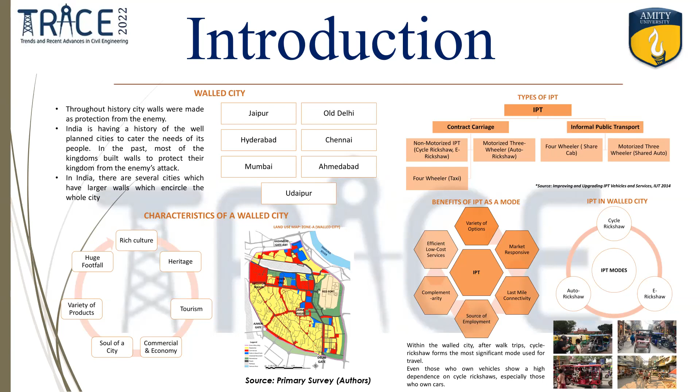The aim of my research was to analyze the impact and vitality of IPT in Walled City, Delhi, and provide suggestive measures to improve the IPT system and introduce an intelligent transport system in the study area, so as to improve the overall management and efficiency of this particular mode in the study area.

Three basic objectives were framed. The first was to analyze the existing IPT system, then to identify the issues and shortcomings of infrastructure and management in the existing IPT, and to deliver planning interventions for improving the existing situation of the IPT system in the study area.

For the literature review, a few papers and reports were referred to. The major findings helped me understand the role and impact of IPT in bridging the gap between public transport and other modes, especially the types of IPT and their roles, along with the character of the walled city and the specific role of IPT there, which I understood after studying the case studies of walled city Jaipur and walled city Udaipur, discussed further in the paper.

I also studied the role of cycle rickshaw in the walled city, including average trip length, fare, and preference of cycle rickshaw within the study area, the walled city of Delhi. This was from the paper submitted by Rajat Bose and PK Sarkar.

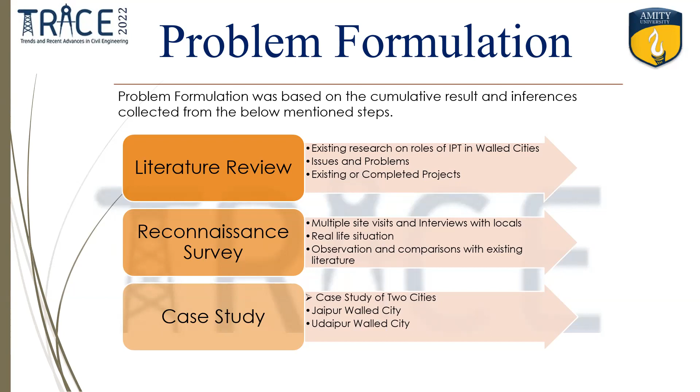So there were two case studies, Jaipur Walled City and Udaipur Walled City. Then the methodology: initially, the first task was identification of the problem, for which I had to finalize a study area. After finalizing the study area, literature review and case studies were done on the basis of the study area, and then the objectives and aim were formulated.

The next step after finalization of the aim and objectives was data collection. For data collection, both primary and secondary data were collected. For primary data collection, surveys like OD survey, recce survey, TVC survey, interviews, travel speed survey, and speed delay survey were done. For secondary data, maps, reports, and documents from RTO, development authorities, and municipalities were collected.

The next step in the methodology was data analysis and inferences. Then a SWOC was prepared, and after that proposals and planning interventions were provided. For data analysis, five parameters were taken out from the inferences of the case studies: road network characteristics, travel characteristics, traffic characteristics, IPT infrastructure, and traffic management.

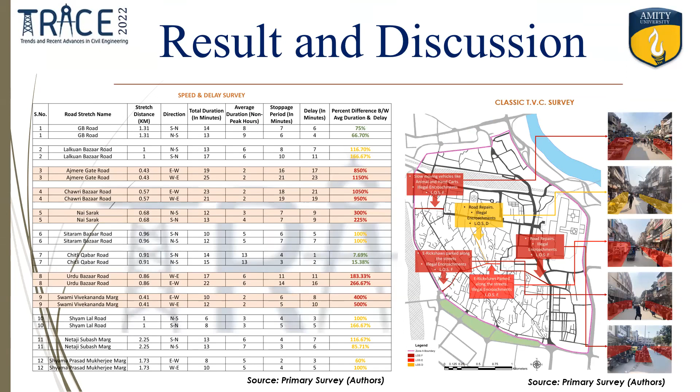To understand the socioeconomic profile of operators and information regarding IPT users, two surveys were conducted: IPT operator survey and IPT user survey. From this it was observed that the major issues were that it was an unorganized mode, there was lack of infrastructure provision by authorities, heavy competition due to large fleet size, price controlled by contractors, no provision of stands, undefined routes and fares, and a lack of economic stability for drivers.

After doing the complete analysis, multiple issues were identified, and for solving these issues proposals were provided: route management, new IPT policies and framework, enhanced usage of ITS and IPT management, provision of IPT infrastructure, financing of IPTs, fare fixation, and junction redesign.

In the end, I would like to conclude that IPT, even though it isn't formalized, serves a huge population in India, and it can be the key link for a successful public transportation system in India. Through this research, what was aimed was to establish the role of IPT as a key link between MRTS and people, so it can bridge the gap currently present in the existing system.

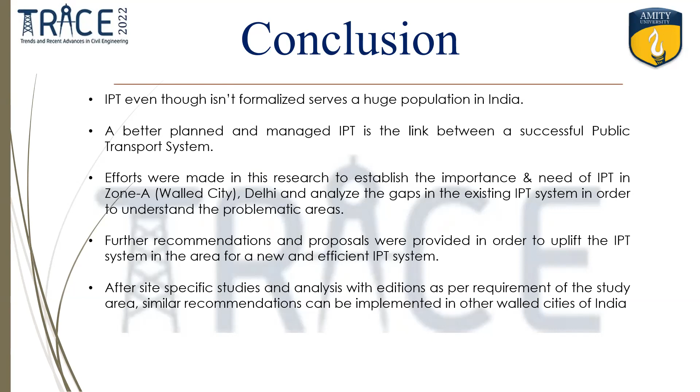Recommendations and proposals were provided in order to uplift the IPT system in that particular area for a new and efficient IPT system. After site-specific studies and analysis, with additions as per the requirement of the study area, similar recommendations can be implemented in other walled cities of India as well. So, sir, with this, I conclude my presentation.

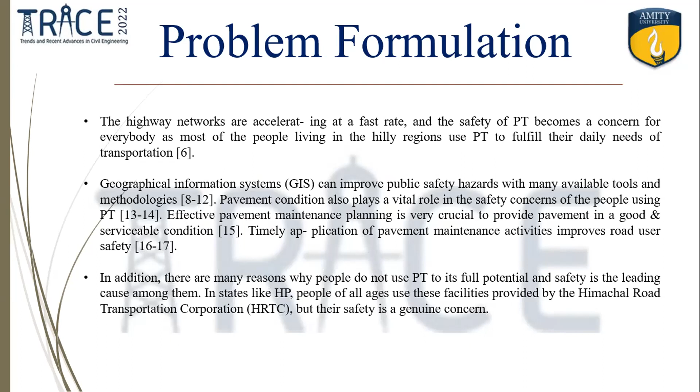In Himachal Pradesh, the main public transportation facility is given by Himachal Road Transportation Corporation, where public and private buses are used. The accident pattern was analyzed, with data collected mostly from police stations and previous literature. The data were collected and a questionnaire was formulated, with the help of which people were surveyed.

A one-to-one survey was conducted, as we, the research scholars, went to people in Himachal Pradesh where they could be asked various questions. The data was then collected, and a qualitative and quantitative analysis was performed.

The questions included: how old are you and the other members of your household? Are you a caregiver for a person over age 60 or with a disability while traveling? What are the advantages provided to disabled people?

Other questions asked whether they would prefer an MRTS if constructed in Himachal Pradesh in future, what type of buses they prefer—private or public, old or new, or AC Volvo buses that ply on various routes and origin-destinations—and if they do not use the bus, why not.

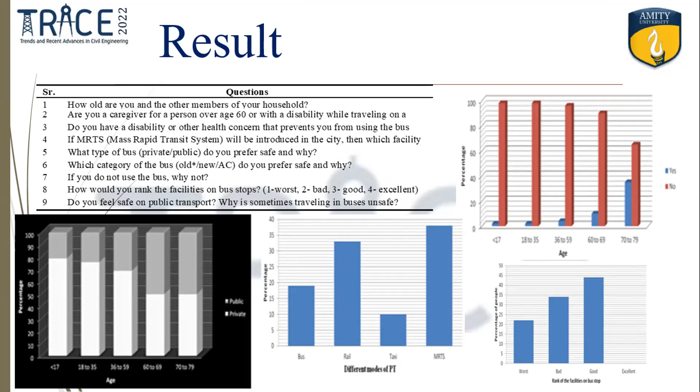Based on that, various results emerged regarding reasons for unsafe travel, such as rash driving and night driving, where drivers drink and then drive, causing various accidents.

However, the massive challenge in Himachal Pradesh is to fulfill the needs of all groups of people. Security is essential for everyone, providing safe and low-cost public transportation. So people prefer public transportation, but safety is always neglected because there are various old buses plying on these hilly routes.

If the old buses are replaced by new ones, the facilities can be improved and people will have better service, and based on that, the safety of the people will also not be compromised.

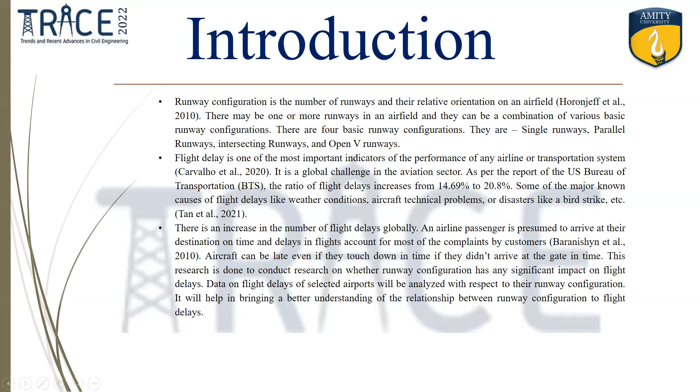So for flight delays, we have runway configuration. We have four types of runway configuration. The first is single runway configuration, where we have only one runway. This is ideal for small airports and similar cases.

And second, we have parallel runway configuration. This is mainly used for large airports.

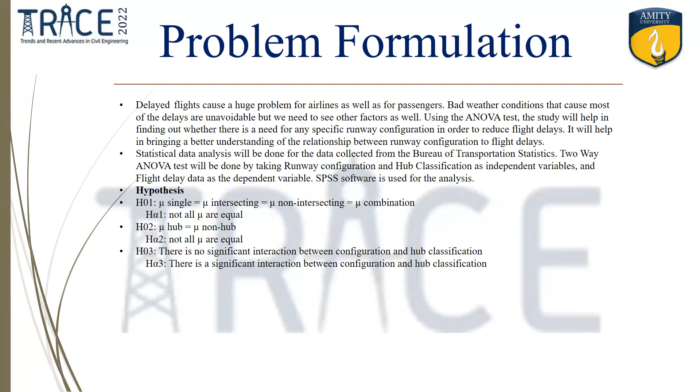In methodology, I have collected data from various airports in the USA. 40 airports were selected with different runway configurations. I have classified the runways into single, intersecting, non-intersecting, and combination, because in actual airports we don't only have open V or parallel runway configurations.

So we have to configure it this way: if there is only one runway, we set it as single. If they are intersecting, we set them as intersecting. If they are non-intersecting, we set them as non-intersecting. And for combination, if there is a combination of intersecting and non-intersecting runway configurations at an airport, we classify it as combination runway.

And for hub classification, according to FAA, airports are classified as hub or non-hub. So these are the data I have collected for the 40 airports.

Delay data of 2021 in percentage. For data analysis, I have done two-way ANOVA in the SPSS software, done at the 0.05 alpha level. This is the descriptive statistics for the delay data, showing the mean and standard deviation and the number for hub type, non-hub type, and all this.

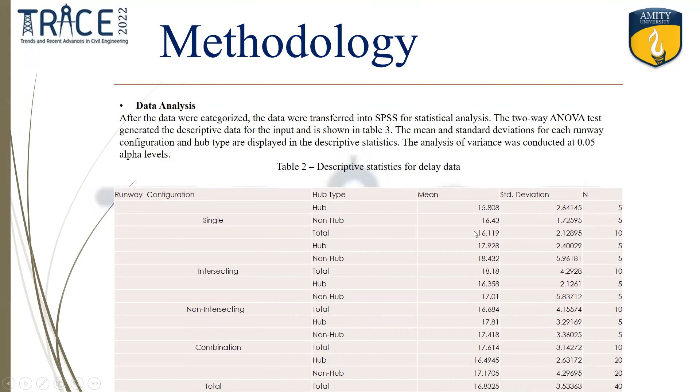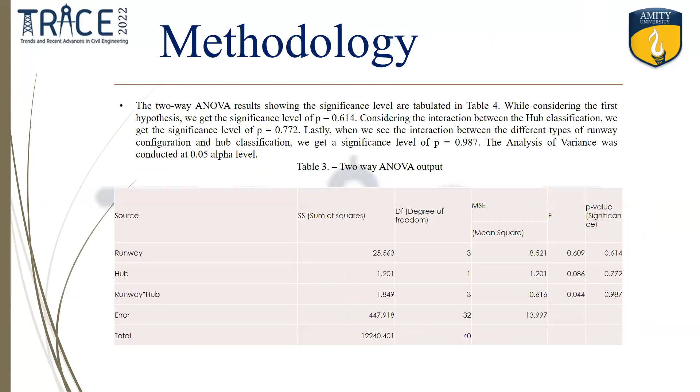Please try to wrap it up in the next 1 minute, sir. Please try to wrap the presentation in the next 1 minute. So representation - yes. This one, no? I'm saying we have limited time. Please try to wrap the presentation in the next 1 minute. Okay.

So we have failed to reject all three null hypotheses. There is no post hoc test required because all three null hypotheses failed to be rejected.

In conclusion, the study concluded that I selected data for airports with more than 10,000 passengers annually. For that, no specific runway configuration plays a significant role in flight delays. So for reducing flight delay, no further studies among the 4 types of runway configuration in the USA are required, but this will be helpful if we consider airports from other parts of the world as well.

Lastly, the concept of circular runway configuration may be adopted on a trial basis. Since the 4 basic runway configurations did not play a significant role in flight delay, we can try the new type of runway configuration - the circular or endless runway configuration. Though it is still an idea, we can try it on a trial basis. Thank you, sir.

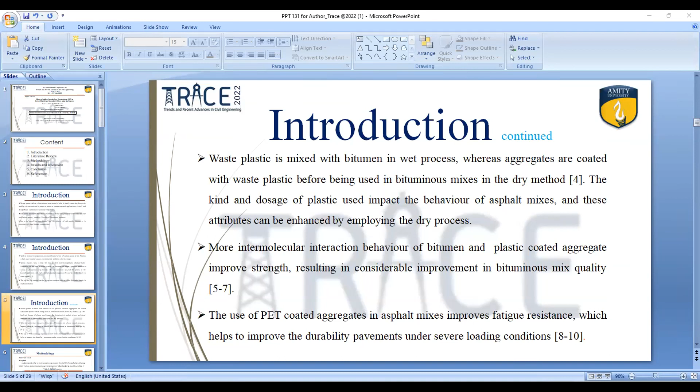Yes sir. The proportioning of material affects the mechanical and volumetric properties of bituminous mixtures. As demonstrated in the previous table, the material proportioning for dense bituminous macadam was carried out. 1200 grams of material was used to create the Marshall specimen.

Bitumen concentration varied between 4.1 and 4.9 with 0.2% increments. Separately, the bitumen and aggregate were heated to 150 degrees Celsius and 170 degrees Celsius. Once the bitumen was suitably coated over the aggregate, filler material was added after the materials had been well mixed to create a homogeneous mixture.

Then hydrated lime filler was added at the end of mixing to control the voids in the mixture. When the mixture was uniform and ready to be put into the Marshall mold, mixing continued at 160 degrees centigrade, then 75 hammer blows were used.

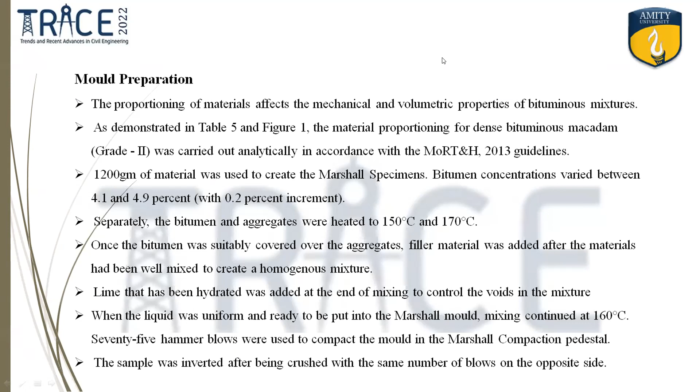So these are the samples. Then the Marshall stability test, then another test is retained stability, which is the ratio of Marshall stability of conditioned sample to the Marshall stability of unconditioned sample. Then the indirect tensile strength test, then the wheel tracking test.

Now these are the results. Marshall stability value of modified mixtures increases up to 10% PET concentration, and thereafter it drops the stability value. These are basically the various bitumen contents: first one is 4.1, then 4.3, then 4.5.

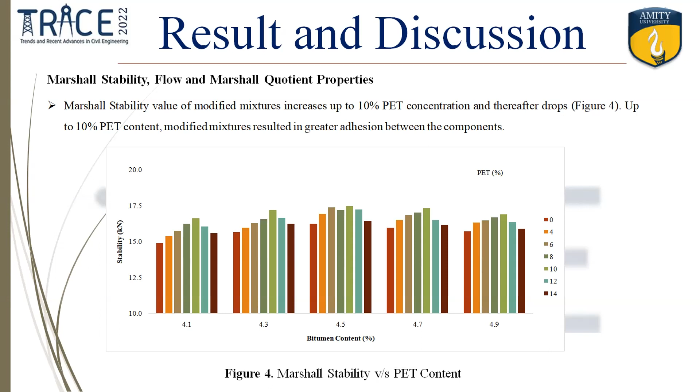Now come to the flow value. Modified mixes are attributed to fatigue cracking, going to increase stiffness up to 10%. Then come to the higher Marshall quotient, then the retained stability, which increases up to 12% PET content.

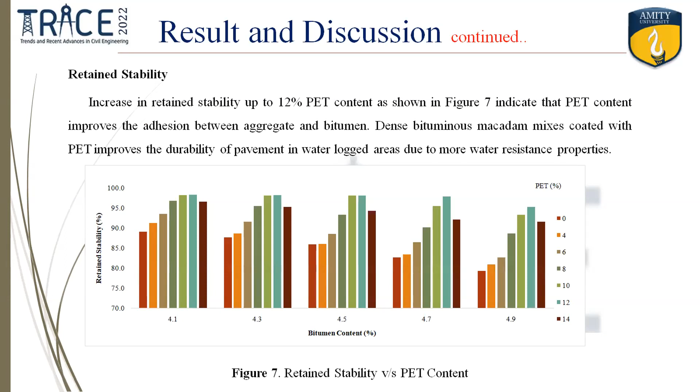As shown in figure 7, PET content improves the adhesion between aggregate and bitumen. After 12% it decreases. Then indirect tensile strength also improves up to 10% PET content, showing the results, after which it also decreases.

Optimum bitumen content comes out to 4.82%, whereas it is 4.50% at 10% PET. Rutting performance and behavior of conventional and modified mixes at optimum bitumen content is shown in figure, and these are the rutting results.

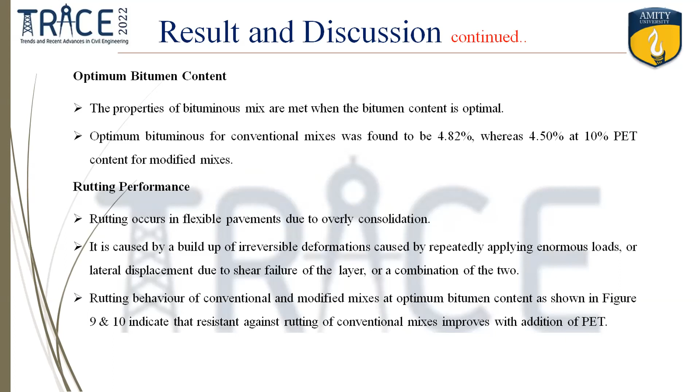Then come to the conclusion part. The goal of the study was to see how dense bituminous macadam grade 2 would react when polyethylene terephthalate was added using the dry process. The mechanical properties required for an ideal bituminous mix were assessed.

Marshall stability improved up to 10% PET concentration. The stability of modified mixtures demonstrates higher adherence. The flow value of modified mixes increases up to a dose of 10% PET and decreases thereafter. The Marshall quotient of modified mixture is higher, which fulfills the condition of stiff bituminous mixes. High retained stability of modified mixes increases the durability of flexible pavement.

With the addition of PET to DBM mixes, the optimum bitumen content was lowered to 4.50%. Compared to traditional mixes, the rutting performance is also superior. Hence, for safe disposal of non-biodegradable waste plastic, the present study is helpful for better durability of pavement along with environment-friendly solutions. Thank you. These are the references.

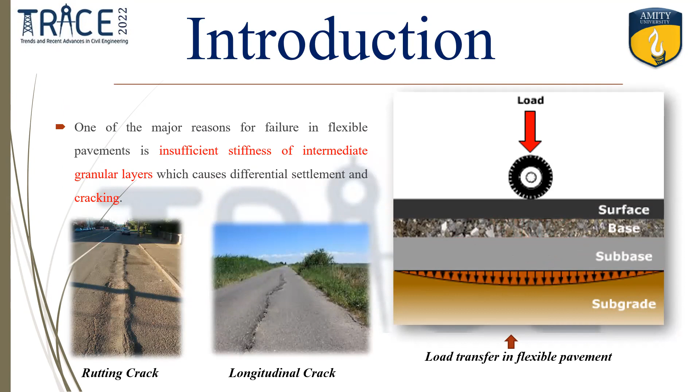As a little introduction, we all know the mechanism behind flexible pavement, the layered theory, which says that stress and deformation in one layer will get transferred to other layers as well. So if there is a weak layer anywhere in between, it will reflect as a crack on the surface. So it is essential to reinforce any weak layer if it is there in between.

Among the various techniques of improvement, geosynthetic reinforcement is a popular and most efficient technique. There are different types of geosynthetic reinforcement in planar and cellular forms. It has been used in other applications also, and in pavements too. Studies have proven that geocell, the cellular form, appears to be better than the planar form, the geogrid, due to the additional confinement effect offered by the geocell walls.

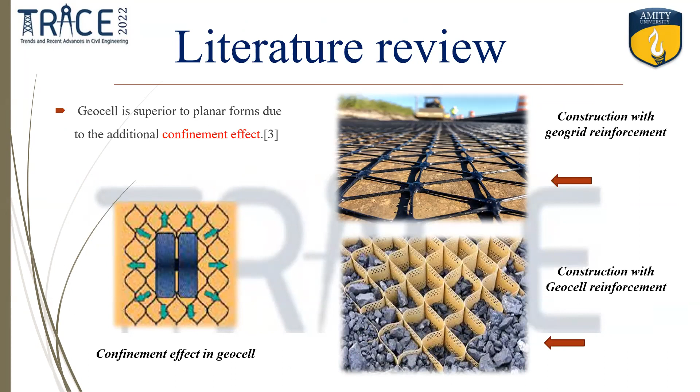The main mechanism behind geocell reinforced soil involves two mechanisms: wide slab mechanism and membrane action. The wide slab mechanism refers to the rigid slab-like action of the composite joint formed by the soil and geocell, which widens the load dispersion angle, so as a result the stresses on the lower layers get reduced. The membrane action refers to the tensile stress developed on the surface upon loading, which enables the membrane to take up a proportion of the imposed load.

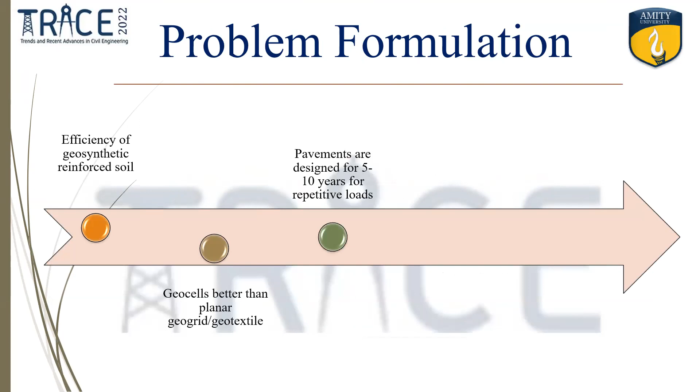So it is in this context we have formulated the problem, considering the proven role of geocells in improving pavement performance, we are assessing the time-dependent response through a study on various influential parameters. We are assessing the effect of various material characteristics of base material, properties of subgrade material, and of geosynthetic, as well as the effect of geocell geometry, that is aspect ratio. In both cases, we assess the effect in terms of wide slab mechanism and membrane action separately.

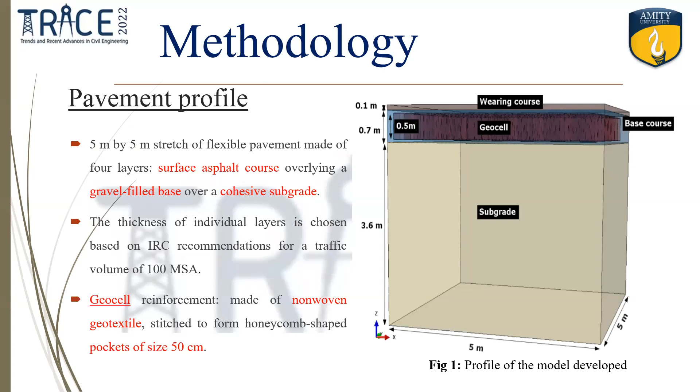This is the pavement profile we are assessing. It consists of a surface asphalt wearing course followed by a granular base in which we are embedding the geocell reinforcement, beneath which there is a subgrade. The geocell reinforcement is made of a non-woven geotextile.

We have a laboratory scale down specimen, using non-woven geotextile with stitched pockets. Using the scale down specimen, we are tracing out the coordinates to develop the numerical model as shown in the figure here.

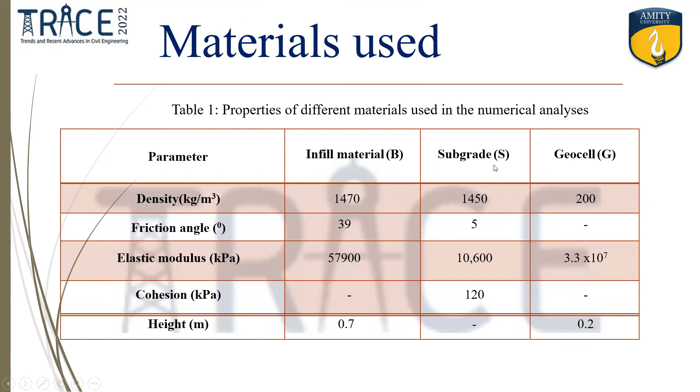These are the properties of materials used: the infill or base material B, subgrade S, and geocell G. These are the basic material properties, and with respect to this, we are varying the properties of base, subgrade, and geocell.

All soil layers are modeled using linear brick elements with reduced integration, that is regular stress elements, whereas the geocell or geosynthetic material is modeled using linear elastic behavior with membrane elements with reduced integration.

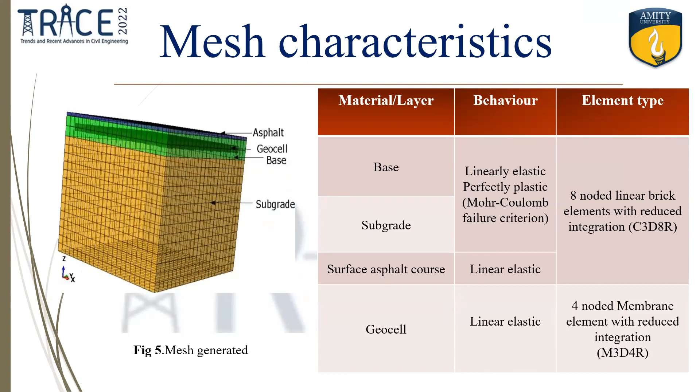Coming to the parametric study, we are assessing the effect of various material characteristics: the infill material is varied as B1, B2, B3, three different types of infill; then three different subgrade materials S1, S2, S3; and three different geocell materials. We are also assessing the effect of geocell wall height.

Three different heights of geocell are embedded in the granular layer of 0.7 meter thickness: 0.5 meter is the high geocell wall, 0.4 meter is medium height, and 0.2 meter is the low geocell wall.

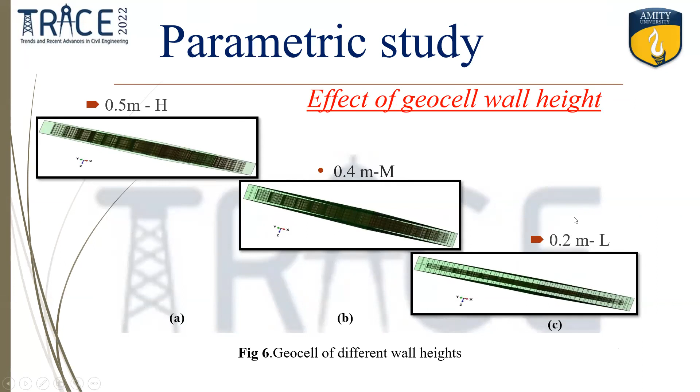Then we vary the subgrade characteristics, and the whole set of trials is repeated for the three heights: low, medium, and high geocell wall.

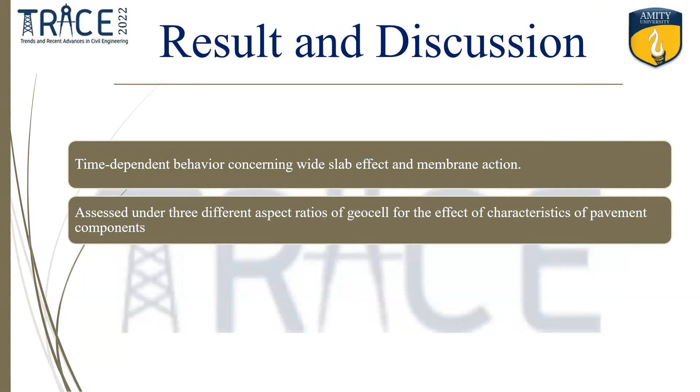Now coming to results and discussion, we are assessing the time-dependent behavior concerning the wide slab effect and membrane action under three different aspect ratios of geocell, for the effect of various pavement components. First, we assess the subgrade deformation with respect to time.

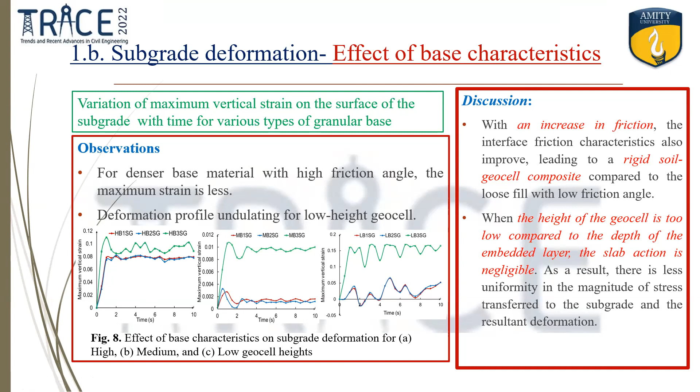Next is the subgrade deformation effect of base characteristics. This graph shows there is an effect from base characteristics: when using a denser base material with higher friction angle, the maximum strain is less. With increased friction, the interface friction characteristics also improve, so the soil-geocell composite becomes more rigid, and hence the maximum strain is less.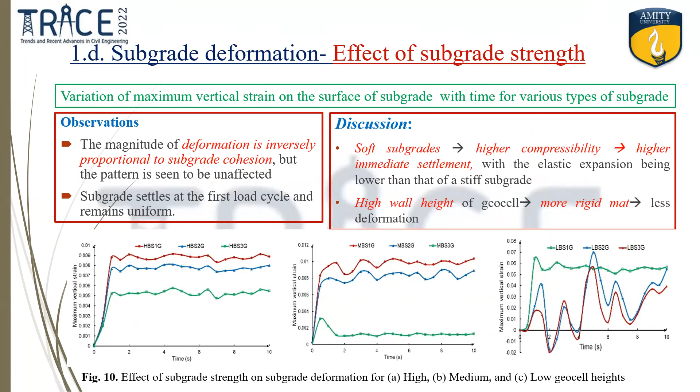And the fourth one is the effect of subgrade strength on subgrade deformation. The magnitude of deformation is inversely proportional to the subgrade cohesion. This is as expected, because soft subgrades mean higher compressibility, which indicates there will be a higher immediate settlement. So here also the fluctuations in case of low wall height are visible.

The second parameter compared is the surface deformation. The deformation is least for a high wall geocell and the most for a low wall geocell.

The third thing is the membrane action. So the first two compare the wide slab mechanism, and the third parameter assesses the membrane action of the reinforcement, that is the magnitude of shear stress mobilized on the geosynthetic reinforcement. It can be seen here that the membrane action is directly related to the geometry.

For high wall geocell, the shear stress developed is maximum. The pattern is almost the same for all three, but the magnitude of shear stress is directly related to the stiffness. This is expected because increase in wall height elevates the effective area of a geocell, so more tension is developed in the mat.

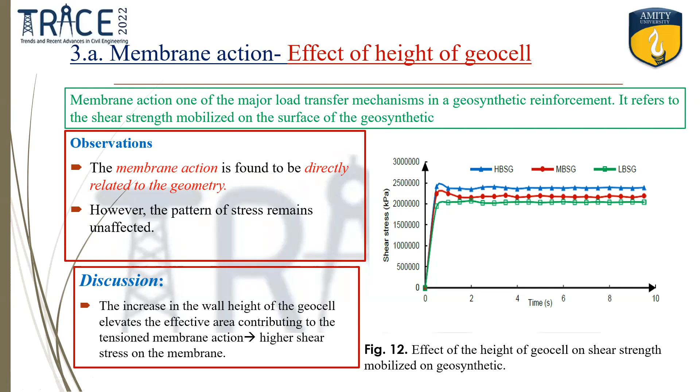Ma'am, last 2 minutes, please. Okay, trying to wrap it up soon.

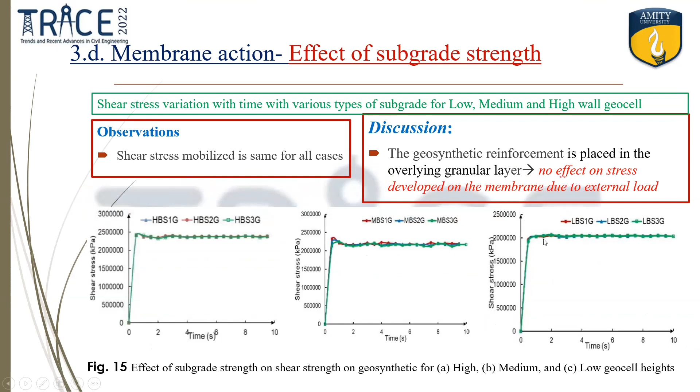So that's all. Now based on that, we have concluded this: the wide slab mechanism is negligible at a low aspect ratio of 0.4, and though it is affected by the characteristics of base material, subgrade characteristics, and stiffness of geosynthetic, the aspect ratio is very important. The membrane action is purely a function of stiffness and geometry of geocell.

That is, the characteristics of the geosynthetic is the only factor which affects the membrane action in a reinforcement. It is independent of the characteristics of pavement layers. And now, considering economy and efficiency, a minimum aspect ratio of 0.8 should be adopted.

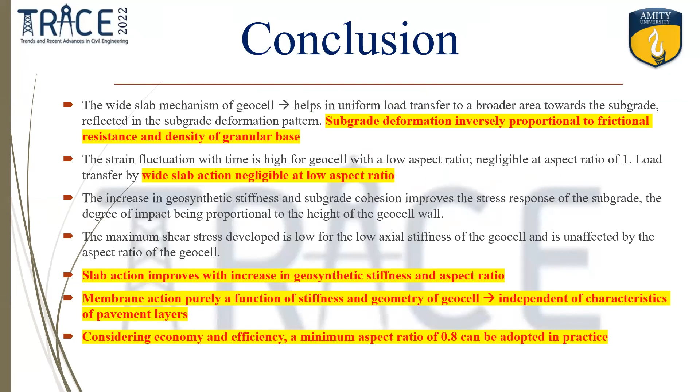And the scope for future studies: in this study, we are not including cost analysis, because a reduction in thickness cannot be incorporated into this, since we are considering a constant base granular layer thickness, as we have to embed the geocell of 0.5 meter. So cost analysis can be included based on the findings from the study.

And then the second thing is field studies, which can be incorporated for an overall assessment. That's all, these are the references. Thank you.

Thank you, ma'am. It was indeed a very good and informative presentation, quite an interesting topic as well. Thank you, sir. Abhishek sir? Yeah, thank you ma'am for the nice presentation.

Thank you sir, I'm just trying to understand, like you said, it is a time-dependent response of geocell. Yes sir. So when you're talking about time dependent, did you consider that over a period of time the material would also start degrading? Did you consider the decrease in strength of the material and pavement layers in your response? Because I did not see that it is time dependent, I need clarity from your side on this.

Yes sir, for this study we are not analyzing the variation in material characteristics with time, right? Yeah, obviously they'll also start deteriorating with time. For this study, however, the material characteristics are assumed to be constant. Okay, so but the stress developed on the membrane will be changing, and that reflects as the subgrade deformation and membrane deflection also. So in that sense, only the reflection of material characteristics will be done.

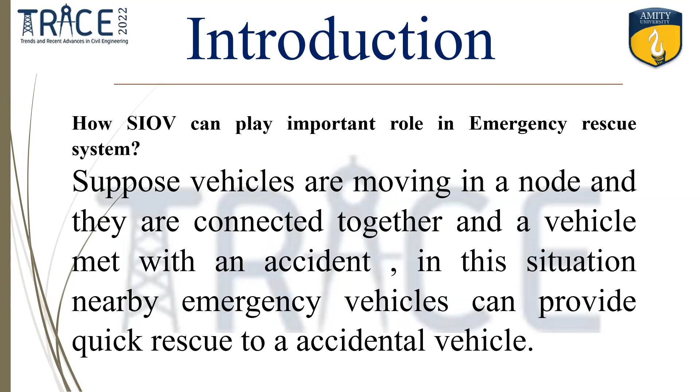I have referred to many papers, but due to time constraints in the PPT, I have only mentioned two authors about it.

Now the problem formulation. We have studied many review papers and found there is no such system available which can provide quick and effective rescue. So our basic idea is to develop a simulated environment to test such situations and build a system using SIOV, which can provide emergency support and be useful in many domains like defense, ambulance, and school buses.

For methodology, to develop an artificial environment we use SUMO and OMNeT++. We have also analyzed data collected from OMNeT++. A Python script was used to filter data, basically an ETL process has been done. So this is our project flow.

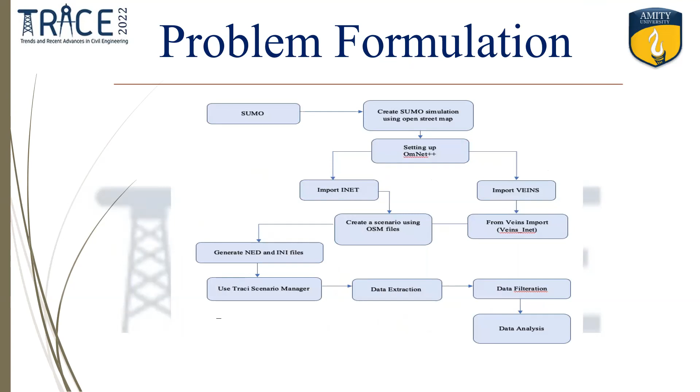Conclusion: in this study, when the first node — basically a car that meets with an accident — sends a packet, we named it 'accident first,' to the radio manager, it is then sent to nearby other nodes which are connected with each other. This shows communication between the vehicles.

This is very helpful, and if used in the real world it could solve many problems, like a school bus stuck somewhere, or it could be very helpful in emergency situations. We've seen many deaths from ambulances in India because of not reaching on time. With this system, vehicles could reach on time and lives can be saved.

And these are the references. Thank you, sir. If there are any suggestions from your side.

Thank you, Vishal. Quite a crisp presentation, I must say. Sorry? Dr. Abhishek, sir. Yeah.

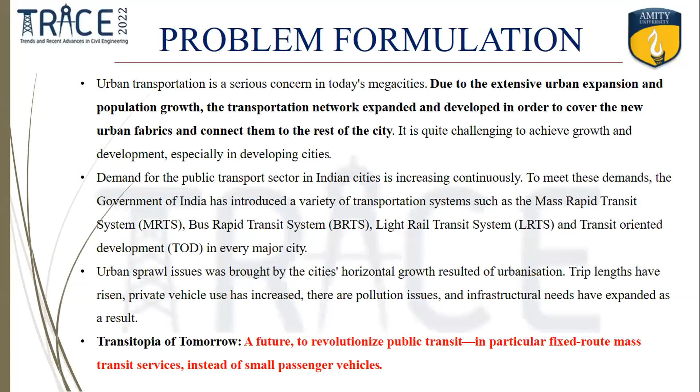So this paper's topic is on the Transitopia of tomorrow, meaning a future to revolutionize public transit, which is basically transit services for mass passengers.

The aim of this conference paper is to investigate the barriers and issues in urban mobility towards decongestion around the globe, to identify mode preferences and the behavior of passengers for travel preferences and first and last mile options, and to enhance public transportation and improve the physical environment in the TOD zone.

The objectives to achieve this aim are: first, to examine and expose various transportation related challenges around the globe and in India; second, to determine the issues and gaps in the current transit system; and third, to suggest viable solutions to the problems by investigating the current hurdles and issues.

Then the basic concept: what is TOD? TOD is transit-oriented development, which is basically focused around transit node facilities combined with complete ease to transit facilities, which includes preferences of people, like to walk, to communicate from one place to another.

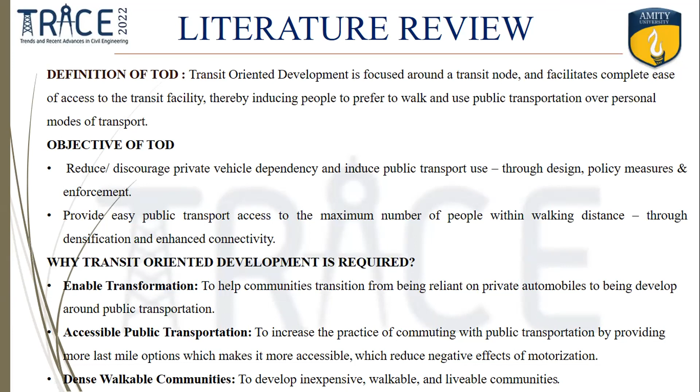Then the principles of TOD, like the policy given by NUTP, which is the National Urban Transport Policy - that TOD policy is defined with 12 measurable indicators, like multimodal integration, optimized densities, traffic calming, complete streets, mixed land use, managed parking, last mile connectivity, interconnected street network, inclusive habitat, and network, and street oriented building.

So on the basis of these indicators, there are 6 sub-attributes, like urban densities, land use diversities, walkable urban design. On the basis of these, there are a few case studies which I have selected for my research work.

These design techniques will finalize the demand estimations. First is reconnaissance survey, then secondary surveys, then a number of surveys like traffic TVC, traffic volume count, OD surveys, public transportation fare surveys, then willingness to shift and willingness to pay, basically whether people really want to choose public transportation or not.

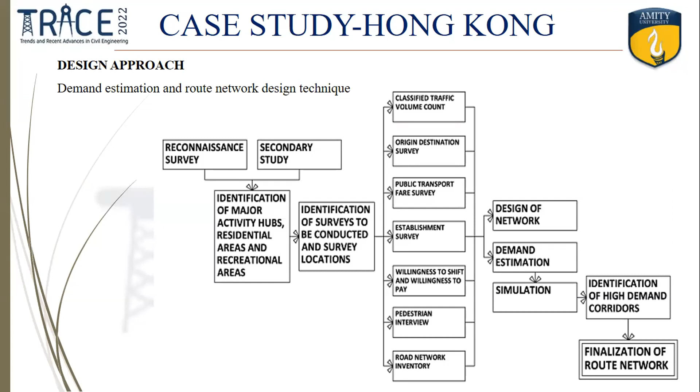Then pedestrian survey, pedestrian interviews, road network inventory. With the help of these surveys, we are able to identify the demand estimation, design of network, and the simulations of traffic flow. On these issues, we can identify the high demand corridors and finalize the route network of the particular TOD zones.

So there are a number of studies on the basis of best case practices where this case study will promote last mile connectivity, TOD development on different types of land uses, like in China, Singapore, Brazil. There are lots of countries where this type of public transportation has been initiated on a larger scale.

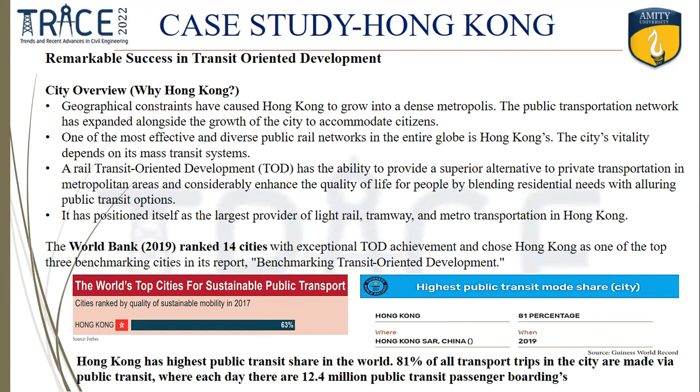Hong Kong is one of the world's top cities for sustainable public transportation, where the percentage of using public transportation is 81%. The model they have implemented in Hong Kong is the R+P model, rail and property model, where they have focused infrastructure on the alignment of rail with property development.

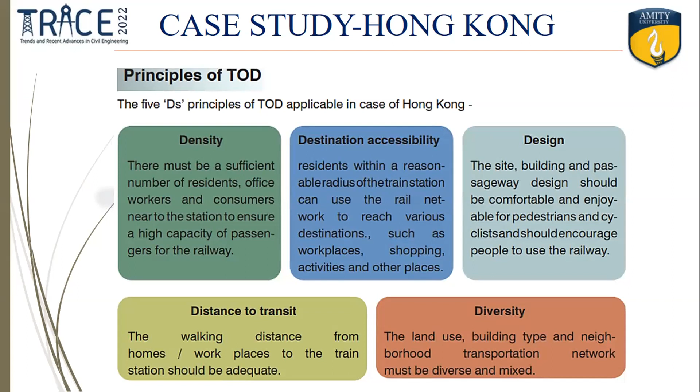Yes, definitely. So on the basis of this model, the air quality index is also very good in Hong Kong city. Then these 5 principles Hong Kong city has adopted, the 5Ds principle: density, destination accessibility, design, distance to transit, and diversity.

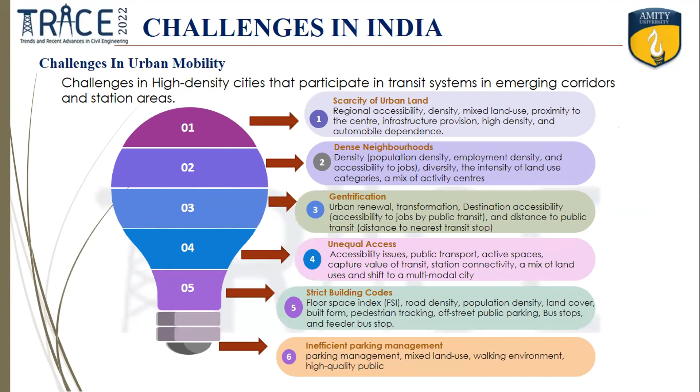Then these are the case studies from globally. Now the public transportation in India. On the basis of a few case studies, these are the challenges we faced in India: first is scarcity of urban land, then dense neighborhood, then gentrification, then unequal access, then strict building codes, and inefficient parking management. To overcome these challenges, these are the issues and barriers we identified through different case studies and literature reviews.

The conclusion of this paper is, by providing a comparison to the best practices around the world, proposing a roadmap for cities to overcome challenges and major difficulties like connectivity, congestion, affordability, safety, and impact on environment. The fundamental development dilemma for users is how to get high quality services at low cost.

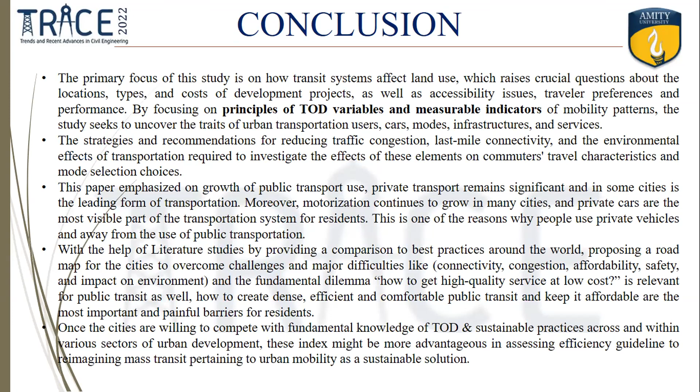And for the public transit transportation system, it will be one of the mass transit solutions pertaining to urban mobility as a sustainable solution. Thank you, these are the references, and that's it.

Thank you, ma'am. It was indeed quite an elaborative presentation, no doubt. It shows the hard work that you have put in.

Abhishek, sir? Yeah, thank you, Snigdha, for your presentation. I have a few queries. Is this purely an academic exercise, or are you doing it with some organization or institution? No, sir, this is basically a research-based project, part of my research project in PhD.

Okay, so then my next question would be, you have identified the issues and barriers in the transit oriented development that you are proposing, but you did not mention how you are going to overcome those barriers and issues, because those issues are going to be there anyway. So how are you going to overcome them and propose the TOD that you're suggesting? That has not been shown in the presentation, or I'm not sure whether I missed it.

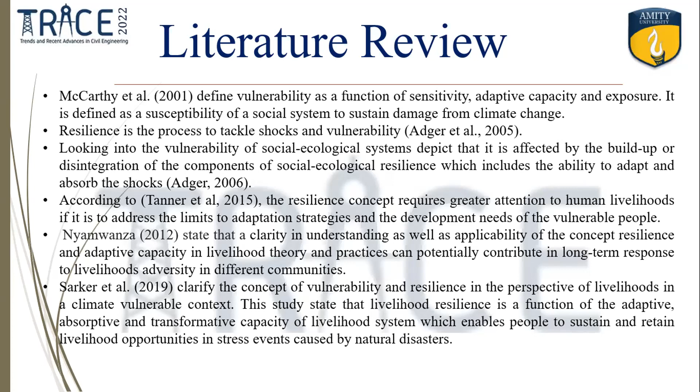In this paper, they measure household livelihood resilience by selecting individual indicators, forming composite asset indexes for each natural capital of livelihood, and then creating an overall composite index to calculate overall livelihood capital and resilience.

Coming to the rationale of the study: Kerala, as a state, joins a long and growing list of flood-hit states in India, having been flooded in 2018, 2019, and 2020, and also facing a lot of various landslides.

Most of the Western Ghats region in Kerala is now victim of climate change because of extreme rainfall events causing floods and landslides. This research is an attempt to understand the resilience of rural livelihood of households in the Chaliyar Panchayat of Nilambur Taluk, Kerala, to extreme rainfall events like floods and landslides.

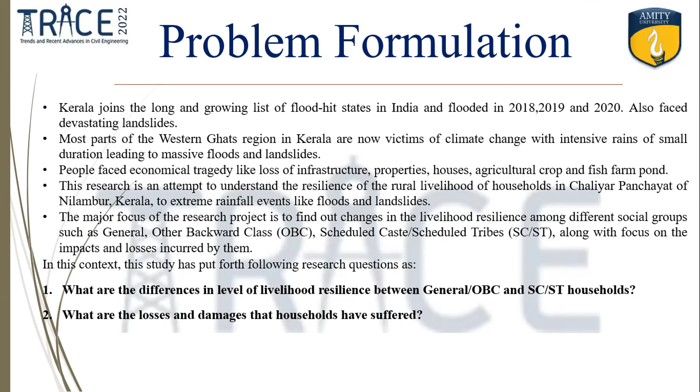The major focus of the study is to find out the livelihood resilience among different social groups, such as general, OBC, and scheduled caste and scheduled tribe, along with the impact and loss incurred by them because of these disasters. The study has put forth two research questions: what is the difference in level of livelihood resilience between these different social groups, and what are the losses and damages incurred by these households?

This study has adopted a mixed method approach with a stratified random sampling of 127 households residing in the flood and landslide prone area. For primary data collection, household surveys using structured questionnaires were used, along with semi-structured interviews with villagers, local panchayats, and village officials.

Secondary data on lost crops and livestock, lost damages, infrastructure properties, and compensation was collected from the Gram Panchayat level. For measuring livelihood resilience, different indicators based on five livelihood capitals were used, and a score was given from 0 to 1. The most desirable response was given 1 and the least desirable was given 0. The higher level of livelihood capital is indicated by higher scores, and thus greater livelihood resilience.

Equal weightage was given to each indicator, and a composite asset index for each livelihood asset was created by taking an average of individual indicators, and an overall composite index by giving weightage average based on the response from key informants.

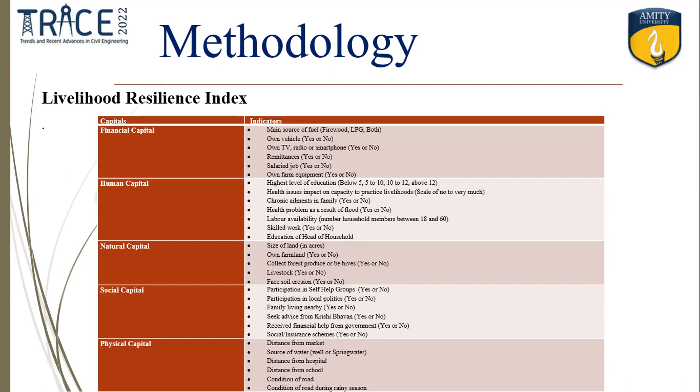Coming to results and discussion, by analyzing the livelihood asset we can see that from the financial capital, most of the communities, specifically from the ST settlements, were facing a lot of loss and damages, and 30 households or families lost their house completely. Most of the people were compelled to stay in shelters during the disasters, which impacted their livelihood.

Coming to physical capital, we can see that the physical environment surrounding the ST households is relatively poor because of the remoteness of their places, which also impacted their accessibility to electricity and proper roads, affecting their education as well as healthcare facilities.

Now coming to natural capital, households in these settlements, specifically the scheduled tribe settlements, depend on spring water or river streams for their water requirement and did not have a proper well, causing water shortage during summers. Also, crop raiding by animals was one of the other problems faced by them in their agriculture.

Now coming to human capital, as mentioned above, low physical capital has had an impact on their human capital, specifically their access to healthcare facilities and education. For social capital, most households in the ST communities were secluded and from remote areas. They did not have active involvement in politics or SHG formation, especially by Kudumbashree, which is a state poverty eradication program by the Government of Kerala.

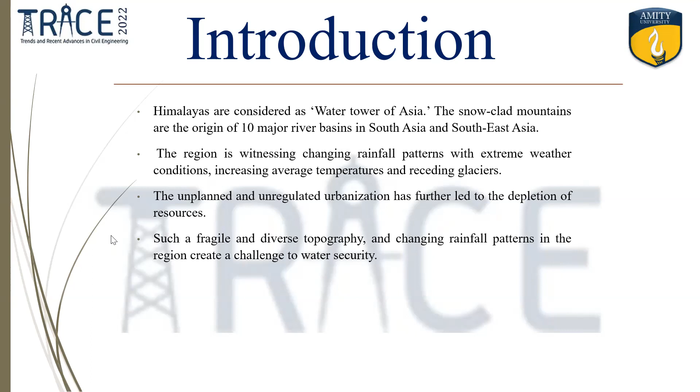So, the state of Uttarakhand, which is also a Himalayan state - the situation there is also not good.

Studies like Gupta and Kulkarni show 50% of the springs in the region are drying up, and the urban population is increasing with out-migration towards urban centers. This migration and population increase comes with a shift from primary resource development to secondary and tertiary sectors, putting pressure on resources of urban areas, basically water.

Uttarakhand also scores very low in the water management index, especially in NITI Aayog's 2018 index.

Coming to the literature review, most studies in the region are on traditional water systems management and governance of water quality, mostly of rivers, resource management, and spring rejuvenation. Most studies are limited to big tourist towns and cities like Shimla, Leh, Dehradun, Mussoorie, Darjeeling.

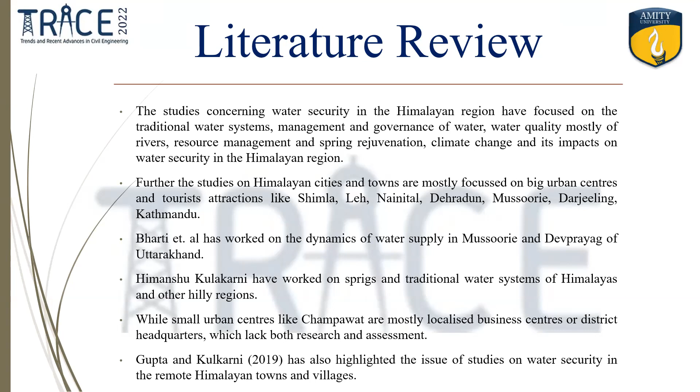So the attempt of this study is to focus on the water security of a small town like Champawat, which is near the Nepal border. Kulkarni and Gupta have also highlighted this lack of studies in these regions. So first, understanding the accessibility and availability of water.

The concept of accessibility and availability of water is attributed to distance and time involved in obtaining water, as defined by Jones and Parker. Availability also depends on the quantity of water available at a certain period of time.

This accessibility and availability also comes in terms of affordability, because if something is unaffordable, it is not accessible. Similarly with water - if it is not affordable, people will not be able to access it. These indicators become very crucial in efficient water management practices, as shown in studies by Beal and Stewart.

The task of this study was to fill these gaps in water accessibility and availability of small towns, so I took the Champawat region - Champawat is the small district headquarters of Champawat district in Uttarakhand.

The study analyzes the present water situation and security by identifying rigidities in water accessibility and availability through consumer perception, or the demand side.

Let me show the survey field. This is Uttarakhand, and Champawat is near the Nepal border. I made this GIS map with the help of a Naziri Naksha.

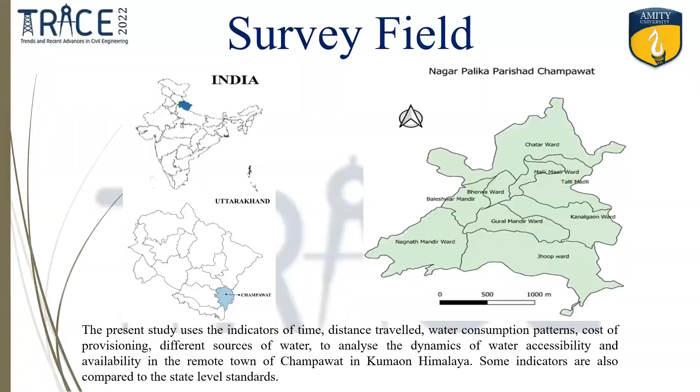This is Champawat - you can see it's a Himalayan town, a small one. It's a very small town with a population of 12,756.

Coming to the methodology, I used mixed research methods. First, I took in-depth interviews of key persons and stakeholders from both the supply and demand side.

The reason was that there were a lot of issues regarding data because it was not available online or in the public domain, so I had to go to the offices and collect this secondary data from them.

How much water is there, what quantity, what is the demand side, understanding the whole water infrastructure there. I also contacted government officials, Nagarpalika officials, journalists, politicians, and social activists of the local region to understand the other intricacies of water accessibility and availability in the local context.

This information from the in-depth interviews helped make the questionnaire for the consumption patterns - basically the consumption survey I did. I took a survey of 180 households.

There are 2551 households there, across 9 wards in Champawat. I took 20 households from each ward randomly, and a structured questionnaire was done after that. A descriptive analysis of the primary data was done.

Coming to Champawat, the sources of water are pipe water supply, wells, public hand pumps, and traditional water harvesting systems.

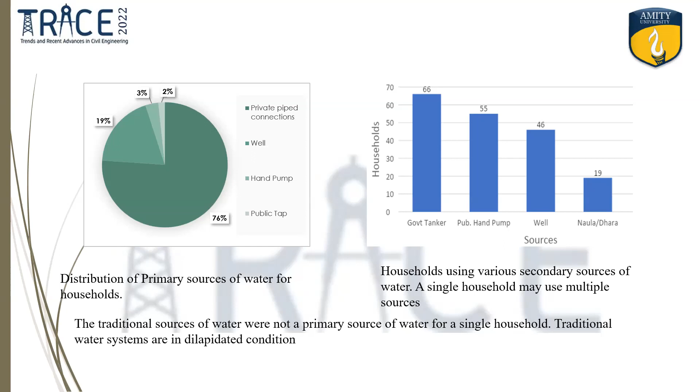And there were people who also disconnected their private pipe connection, because they think water does not come regularly, and the charges are high. So you can see there is only 76% pipe water supply, but even the Jal Sansthan was saying that we provide piped water to 90% of the people. So it was not matching with the data they provided.

Now going to the fluctuations of water availability, most of the fluctuations happen in summer because the levels of water go down in sources, and... I would request you to please wrap it up. Okay, let me wrap it.

Then coming to the water consumption pattern, I took three sources: the piped water connection, the well, and the hand pump. The average total came around 79.53 LPCD, while well was around 98.63. So it can be seen that as the availability is more, the water consumption is more.

I also made a range of how water is being provided and the consumption. Only 7% of people were actually consuming more than 135 LPCD of water, which is the standard they try to provide according to CPHEEO, URDPFI guidelines.

Then coming to water tariffs, they say that water tariffs are high, and if we compare to Uttarakhand, it is 277.50, and they are paying more. This is because of the faulty property tax assessment of the region.

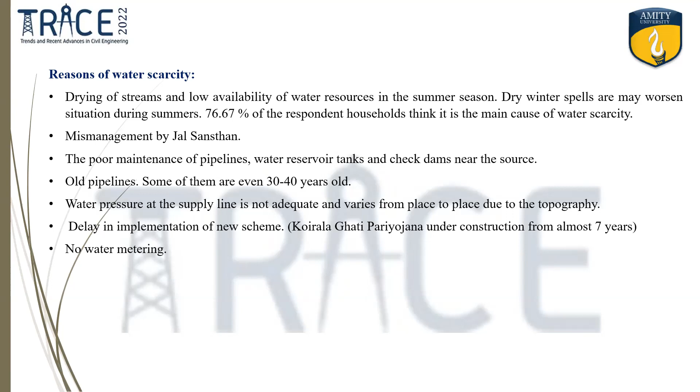Then coming to reasons for water scarcity: the summer season, mismanagement in Jal Sansthan, old pipelines, and rigidity in the system. The delay in implementation of the new scheme, Koirala Ghati Pariyojana, which is under construction for 7 years. Also no water metering in the region.

Also coping mechanisms: people resort to multiple sources because there is also water rationing. Naula and Dhara, people storing water in multiple containers, and people install pumps in their pipelines to maintain water pressure, which is a very major issue in the region. This creates a problem: if one has a water pump, sometimes neighbors won't get the required pressure. So these issues also come up, and installation of pumps is also a way to cope with water scarcity, basically to maintain the pressure.

So coming to the conclusion, we can see that Champawat is not just dependent on piped water supply, but on multiple sources, and the availability of water changes with the water resources.

Scarcity of water is in summer. The various standards are not up to the mark. They say they provide 135 LPCD, which is not there, and also reforms are not there. Water metering is not there.

Urbanization is happening in the region, and it is not the case like it is a tourist destination. No, it is because of the local changes that are happening, local urbanization patterns that are changing, which is actually leading to these issues.

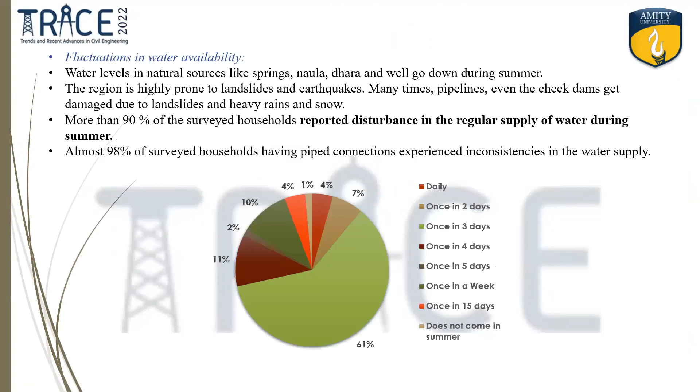Oh ma'am, sorry ma'am, the problem is that in 2011, if you go to Wikipedia, they show only 5,000 because that area of Champawat changed, the Nagar Palika area was increased. So I went to the Nagar Palika and asked. They gave me data from the latest 2016, which according to the 2011 census was changed in 2016 when they made it, because there were elections here. So this is how they gave me the data. So I took data from them only, most of it from Nagar Palika.

Okay, and you showed in your slide the traditional water harvesting system, that is Naula and Dhara. Yes, can you explain it?

Yes ma'am, so Naula is a small well. There is a temple-like structure over the Naula, it's a small well-like structure. Naulas are mostly in sacred areas, so people also use it. There is a famous temple here in Champawat, and also lots of Naulas there. Earlier people used to resort to them. Dharas are basically springs, where water comes out from various places, from some rock it emerges, and there they put some pipe or tap, even structures like a lion or a cow. So it comes out from there. So these are two sources.

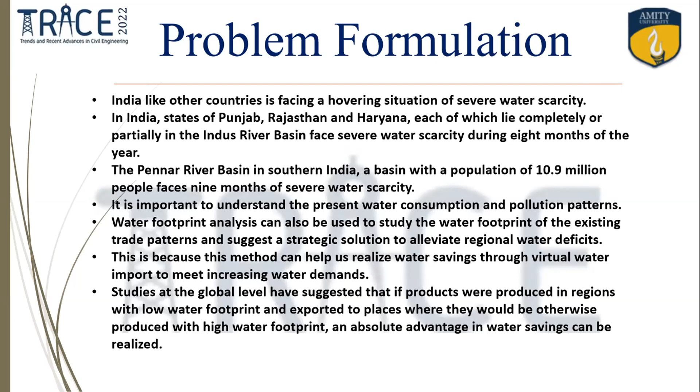The methodology here is that we are attempting to understand the water footprint of India in comparison to global consumption. The data used for this research is from WaterStat, an online database for water footprint assessment. Previous studies from Professor Hoekstra have been used to compile this database, and also some countries have their own databases like Eurostat for European countries, data from which has also been used to compile the information in WaterStat.

National water footprint of production for agriculture, industrial, and domestic sectors has been calculated using the volume of fresh water consumed, accounting for the blue water footprint, and the polluted water, that is the gray water footprint, for different economic activities. Whenever we talk about national water footprint of production, we look at all economic activities taking place in a specific geographical area, including the footprint of any products that will be exported in the future.

When we talk about national footprint of consumption, there are two categories: national water footprint for production, and water footprint for national consumption. For consumption, we need to understand that certain items produced in a geographical area, like India, are exported and not consumed within our country, so we exclude that water footprint since it is export-related, not consumed in India. Whereas for national consumption water footprint, we add products imported from other countries and their water footprint is taken into account.

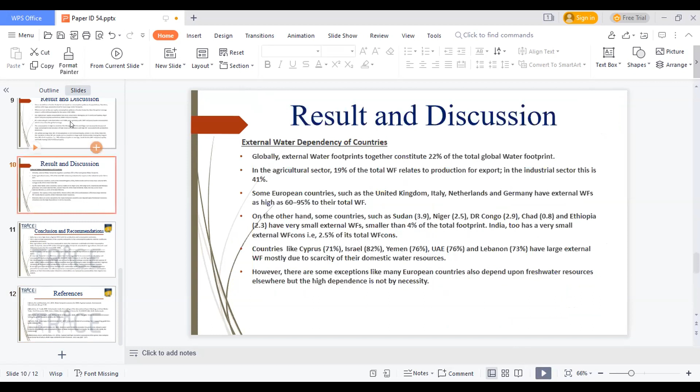Okay, nice. Then in your result and discussion, you showed that in India per capita potable water or something, this 1089 meter cube per year per capita, in result and discussion in India. Yeah, so is it...

You have determined it or taken it from any reference? Ma'am, this WaterStat, that is the online database for water footprint, they have given the values for all the countries. Like I've done a comparative analysis, you have values taken from these. Taken from any literature review, na? This data, no ma'am, this is an online database. And for this database, they have compiled the information from the previous research done by Professor Hoekstra.

So does it come in this result and discussion? Is it your own, because it's not your result, na? This is a database that you have taken from an internet source. Okay. Yes ma'am. So result and discussion means whatever you analyze from your internet or from your survey, that result you have to show in this chapter or category, result and discussion. Yes ma'am. Ma'am, the comparison I have done, like I've taken into account different countries and tried to compare what is the current position of India, like why is it that India is having less water footprint per capita? Yes, okay. Thank you, Dipali.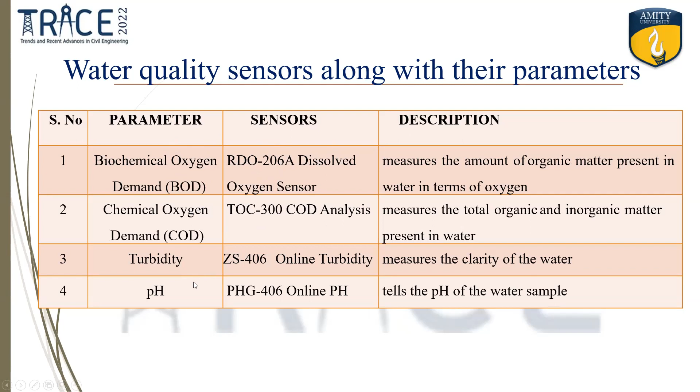The sensor detects the BOD of the water present in the water distribution system, and similarly COD, turbidity, and pH are checked. Parameters like conductivity, suspended solids, and oil are checked by these types of sensors.

These are basically the names of sensors already available in the market. We can install these sensors in our water distribution system so that we can manage the water more precisely with less wastage.

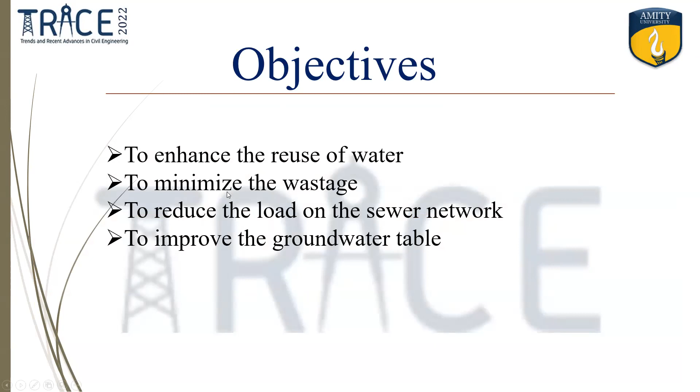With the help of the literature review, I was able to detect my objectives: to enhance the reuse of water, to minimize wastage, to reduce the load on the sewer network, and to improve the groundwater table.

Starting with the better quality water, the water first passes through the overflow sensor, which checks whether the centralized water tank is sufficiently filled. If the tank is overflowing, the water supply to the tank will be switched off automatically, so there will be less water wastage and no leakage.

The water is bifurcated into 3 categories: kitchen, washroom, and miscellaneous activities. In the kitchen, there are taps and a water purification system. In the washroom, there are taps, showers, and flushing systems installed. Miscellaneous covers any taps provided in the home at places other than the kitchen and washrooms.

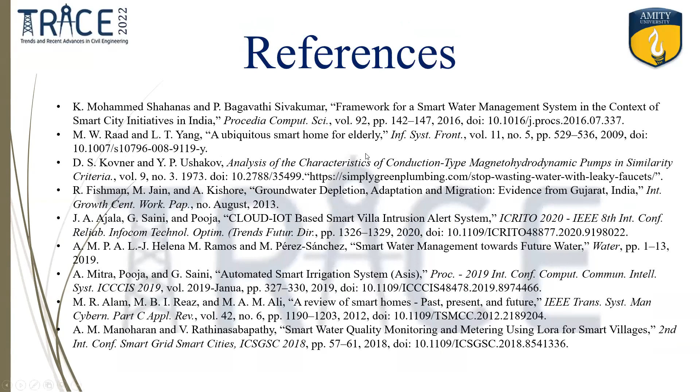Thank you. Very nice presentation.

Anupriya. Yes, ma'am. Okay, Anupriya, is this your MSc work or something else? No, ma'am, this is not my MSc work. This is basically based on a paper I have written. I'm working in a different area.

Okay, so you are in the Department of Civil Engineering and Chemistry. Yes, ma'am. So have you done this practically or is it just an idea? This is my idea, based on certain papers I have read. They have used the sensors in different manners, and there are some case studies as well. So I have taken a different idea, making use of certain sensors which could be put in the water. So basically it's an idea. Okay, so it is an idea.

So in your flow chart, you have shown that if there is an overflow, there is a sensor to stop the overflow water, haina? You have shown that, yes ma'am. If there is overflow. Yeah. So if there is overflow, because it is for, we can say like one university. Okay, in a university there are different departments, some apartments also, house apartments. So everywhere there is an overhead tank and there may be overflow water. Okay.

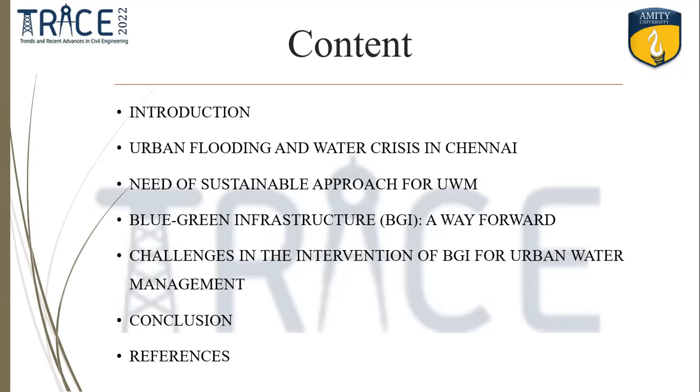This will be the content of my presentation. I'll start with the introduction, then urban flooding and water crisis in Chennai, then need of sustainable approach for urban water management, then blue-green infrastructure - BGI - a way forward towards it, then challenges in the intervention of BGI, and then conclusion, and I'll conclude with references.

Many cities in India have witnessed a rise in the frequency of urban flooding as well as water scarcity. Cities across the globe are facing challenges in urban water management, like flood risk mitigation, improving groundwater level, treating urban effluents, improving water quality. The frequency of climatic extreme floods and droughts has been increasing in recent decades. These extreme events cause huge damages to properties, agriculture, food production, ecosystem, and even loss of life. The urban water system has been severely affected across the globe due to rampant urbanization, industrialization, and climate change.

More than 50% of the world population resides in cities. For India, by 2050, it has been projected that 1 in every 2 Indians is expected to live in urban areas. What happens when we go for rampant, or I would say environmentally unplanned, rapid urbanization? This will lead to decreased blue and green spaces. Blue spaces mean water bodies, and green spaces mean vegetation and forests. It also leads to increased urban flood risk, increased water, air, and noise pollution, loss of biodiversity, urban heat island, and increased risk of ill health.

In this slide, I'm going to explain about the Chennai city and its hydrometeorological condition. Chennai city is the capital city of Tamil Nadu, and it is the 4th largest metropolitan city of our country. The municipal area of the city has expanded from 174 square kilometers to 426 square kilometers. In this city, the northeast monsoon is dominant, causing average annual rainfall of nearly 1300 mm. There are 3 major rivers in the city: Kosasthalaiyar, Cooum, and Adyar River. For its water demand, the city depends on the northeast monsoon and its 4 major reservoirs: Chembarambakkam, Poondi Lake, Red Hills, and Cholavaram Lake.

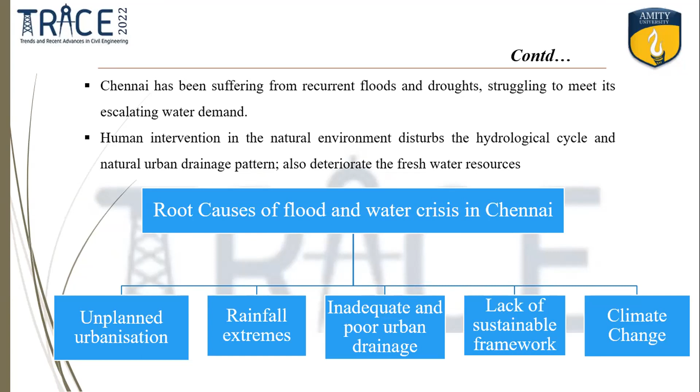What happens is that human intervention in the natural environment disturbs the hydrological cycle, especially the natural urban drainage pattern, which has to be there. It also leads to the deterioration of freshwater resources and surface water resources as well.

The adverse effect of urbanization can be observed in the Adyar River basin, one of the major rivers in Chennai, which was once characterized by wetlands, low-lying areas, and temple tanks. At present, all of these have been enclosed and converted into special economic zones and residential complexes, especially in the last 3 decades.

At present, more than 90% of the wetlands of the city have been enclosed. These wetlands were quite efficient in absorbing excess water during floods and in contributing adequate surface water and groundwater during droughts. Overall, the urban water problems have been worsened by the extreme weather conditions attributed to climate change.

In the last decade, 2 historic climatic extreme disasters happened in Chennai. The first one is in 2015, when the Chennai flood occurred, which is the most disastrous flood of the century. More than 400 human lives were lost, over 2 million people were affected, and properties worth nearly $80,000 million were damaged. On the contrary, just 4 years later, in 2019, the city witnessed day zero.

It means all the reservoirs of the city ran completely dry, pushing the city into severe water crisis. There's an interesting fact: in June 2019, day zero was witnessed in the city, and in January of 2019, that was the wettest month of the whole decade for that city. This is the unique thing about the adverse effect of climate change.

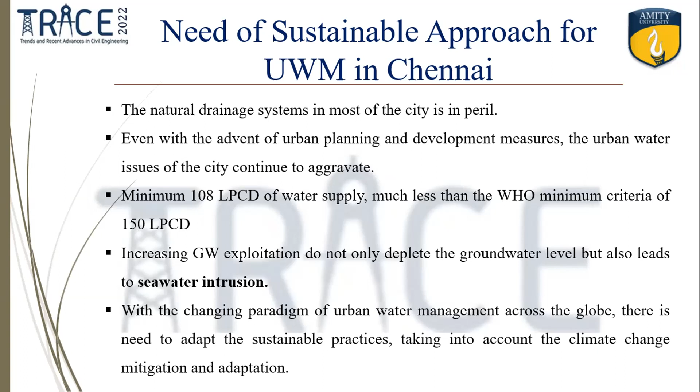Being a coastal city, with increasing population and urbanization, excessive groundwater exploitation will not only deplete the groundwater level of the city but may also lead to seawater intrusion. With the changing paradigm of urban water management across the globe, there's a need to adapt sustainable practices, considering climate change and its adverse effects.

Blue-green infrastructure: a way forward towards sustainable urban water management. Blue-green infrastructure is not a new term, but it's not an absolutely new concept either. It's a new term, but not an absolutely new concept. In the earliest 20th century, this term was coined by a researcher, but not fully applied by the world. But this concept is there.

There is no typical definition of this, but the European Commission of the European Union explains the BGI solution as a strategically planned network of high quality natural and semi-natural areas with environmental features like vegetation, forests, and water bodies, designed to deliver a wide range of urban ecosystem services. When I say urban ecosystem service, it refers to the benefits which are derived from the ecosystem for urban population.

BGI measures help in creating natural circumstances and ecosystem services in urbanism to alleviate urban pressure and to achieve climate change resilience.

In the last 2 decades, there has been increased regional implementation in many European countries, South Asian countries, American countries, and many cities of the world, like New York. I've listed those cities in further slides: New York, Paris, London, Brussels, Melbourne, Victoria in Australia, and even Dhaka.

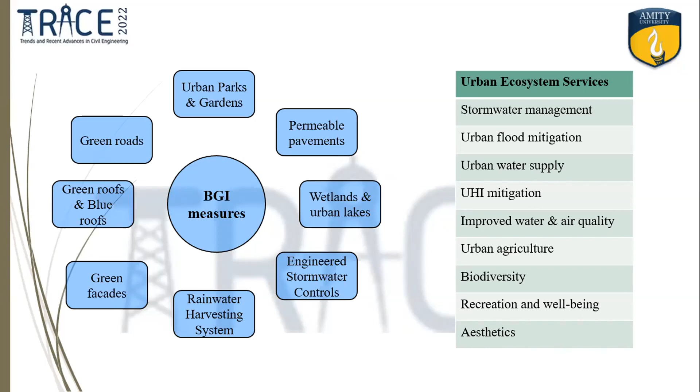BGI adoption plans in some of the major global cities: Rain City Strategy in Vancouver City, Canada, then the Sponge City program in Wuhan, China, Grey to Green initiative in Portland, USA, New York City Green Infrastructure Plan in USA, then Green Living Spaces Plan in Birmingham, UK.

Now, in this slide, I have tried to conclude those major BGI projects of different major cities of the world, and I would just like to mention the Sponge City program. The basic strategy of these major projects are almost the same. They use the BGI measures which I have discussed in previous slides, but with different names.

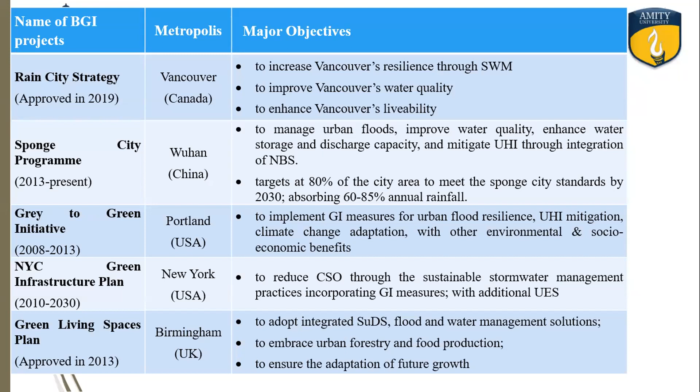Now, these are some challenges in the intervention of blue-green infrastructure in developing countries like India: lack of appreciation of the overarching benefits of blue-green infrastructure, lack of enforceable standards at the policy making and planning level, limitation of BGI research and funding, availability of natural landscapes, and demographic features of the city.

For the conclusion, in recent decades, due to rampant urbanization, there has been increasing impervious area and loss of wetlands in Chennai, which has not only disturbed the natural drainage but also jeopardized its resilience to floods and drought due to drastic decrease in natural land cover. All three major rivers, Kosasthalaiyar, Cooum, and Adyar, have significant issues such as reduced discharge carrying capacity due to encroached floodplains, or are heavily polluted due to continuous solid and liquid waste dumping.

There have been published research reports on this. The Adyar River has almost been converted into a drain, because disposing of untreated sewage in the river has been common practice for the city. The impact of climate change as an extreme weather condition will further aggravate urban water issues if we do not incorporate environmental aspects in urban planning and development.

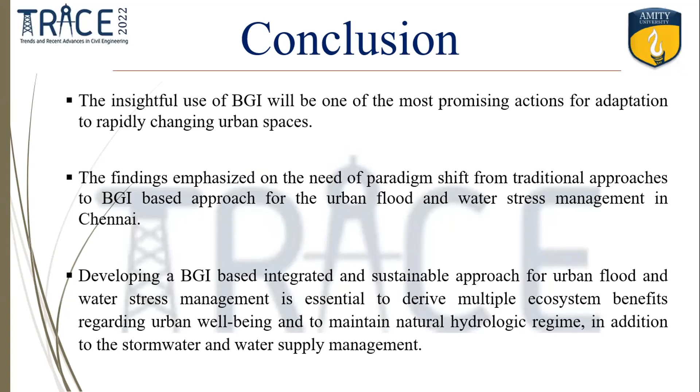Considering the extent of damages, it can be concluded that resilient and sustainable solutions are no longer a choice, rather a compulsion. Developing a BGI-based integrated and sustainable approach for urban flood and water stress management is essential to derive multiple ecosystem benefits regarding urban well-being and to maintain the natural hydrologic regime, in addition to stormwater and water supply management. These are the references.